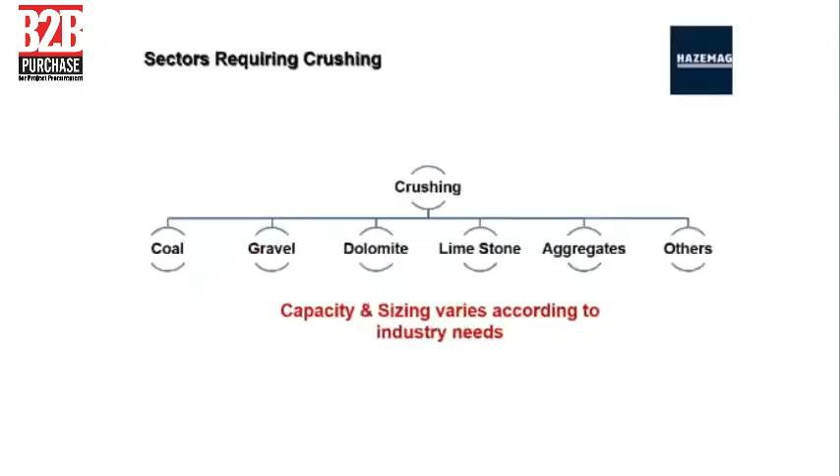As a map per se, we have crushing technology for coal, gravel, dolomite, limestone, aggregate, and other crushings, and capacity and sizings vary according to the industry needs.

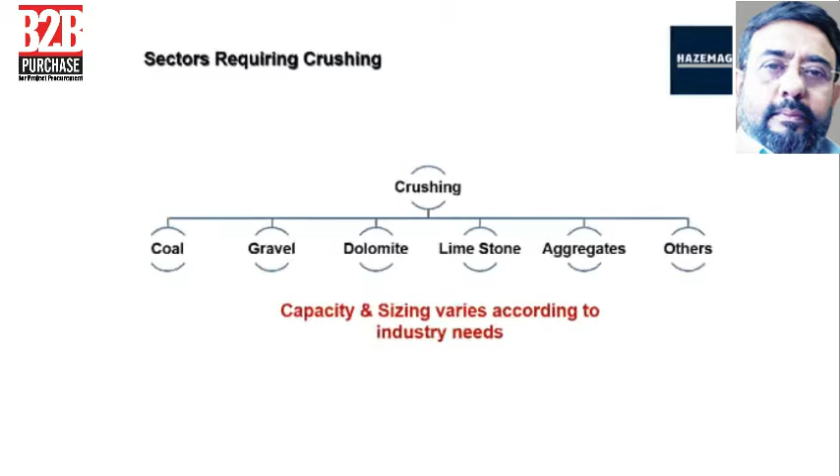So it's very difficult to know exactly what you are going to use in which particular application. That is more important to understand.

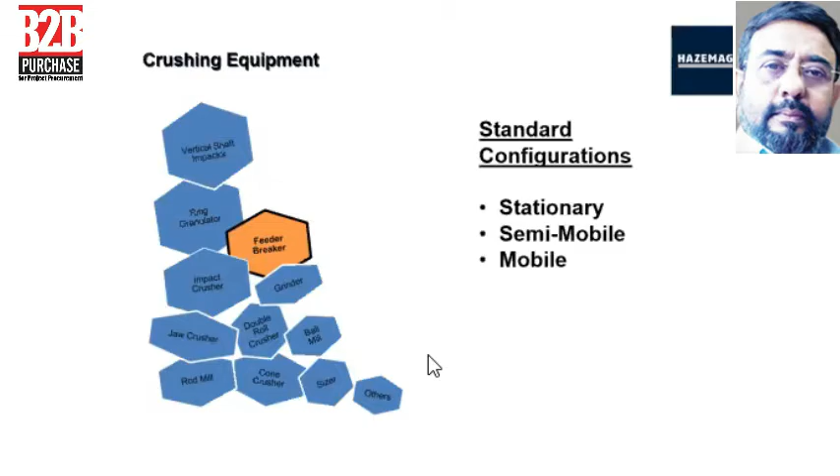Now coming to the case of a mining scenario where coal mining is involved, the market demand is looking for a sizing of minus 100 mm to minus 50 mm closer to the mining face.

Then they are looking for a swiveling conveyor which can do banana stacking, integrated with existing CHP. Many of them have existing CHP, and they want the crusher system to incorporate with that, with low investment on fixed and structural cost, because they have a tendency to move it from one mine to another as required.

Similarly, they are looking for modular design to facilitate easy movement, and pre-screening to enhance the throughput, basically the tons per hour. Everything above leads to one factor: optimum dumper fill factor and shortening of the lead distance.

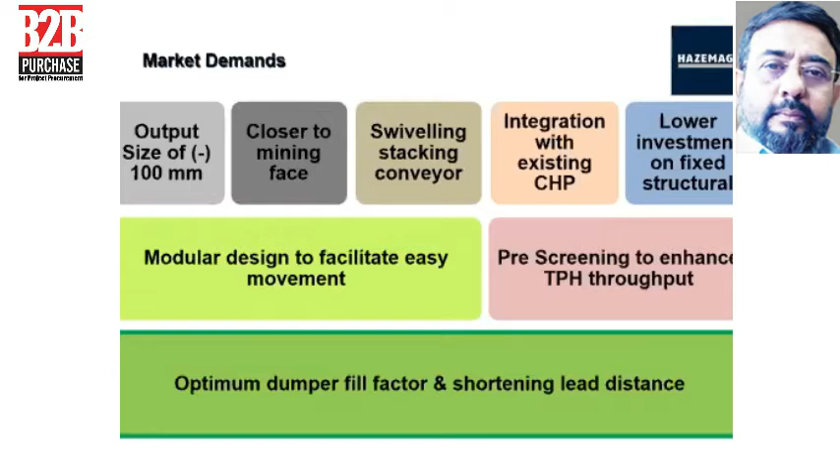So, coming from these demand requirements, we have come out with a solution which was not previously in India, but for the last 10-12 years we have been focusing on this in India, with huge success so far, with limited requirement of structurals, modular design for ease of shifting, reduced cost of production, and lower fine generation.

That is very, very important in today's world. You can see the picture of a particular site where this machine is present, though not very visible.

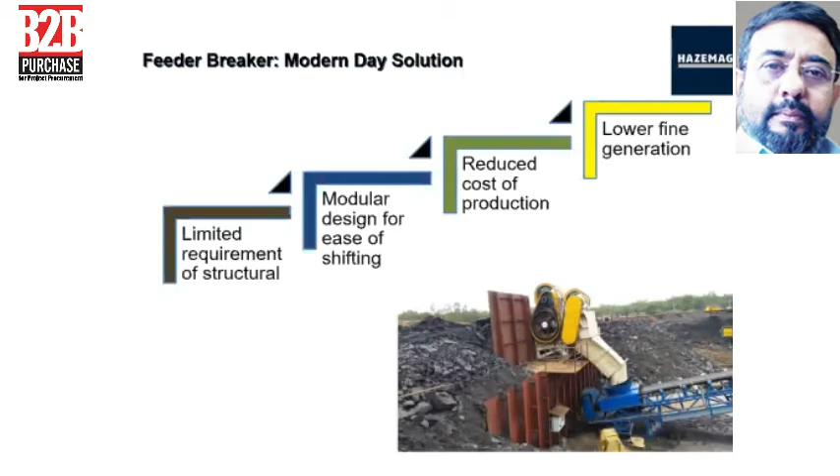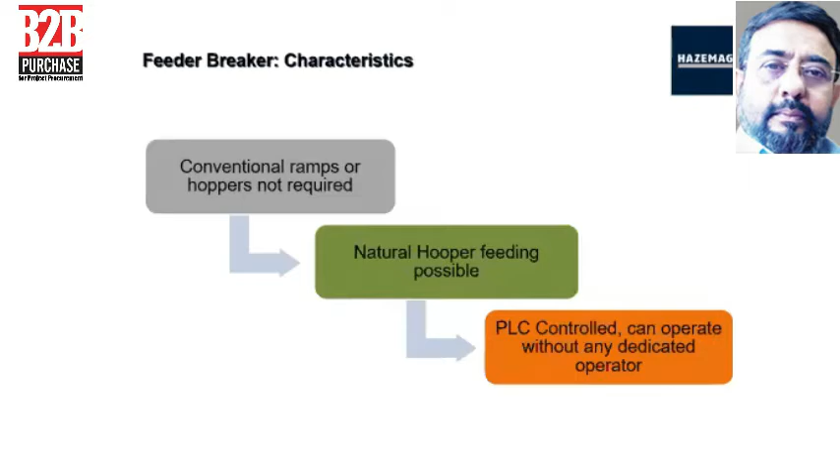Now this particular kind of crusher does not require a conventional ram or hopper to feed the material. It works on natural hopper feeding, which is possible, and these features are PLC controlled, operating without any dedicated operators. So these are the cost-saving aspects that usually go in favor of the customer.

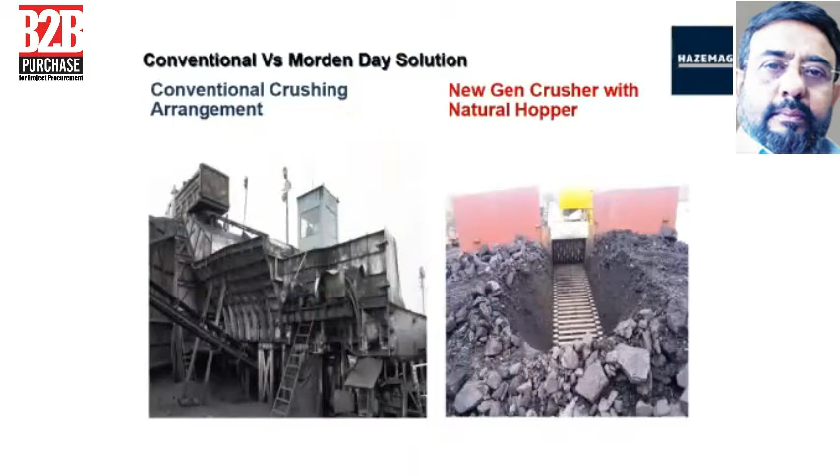Now, for those in the mining segment attending, these are the conventional mining crushers used for the last 30-40 years. In place of that, here is the old one, and the new generation crusher with natural hopper is in front of you.

The machine design is very simple. It has a crusher roll with picks and holders on it, and there is a chain conveyor moving in a covered profile which protects the chain from direct impacts.

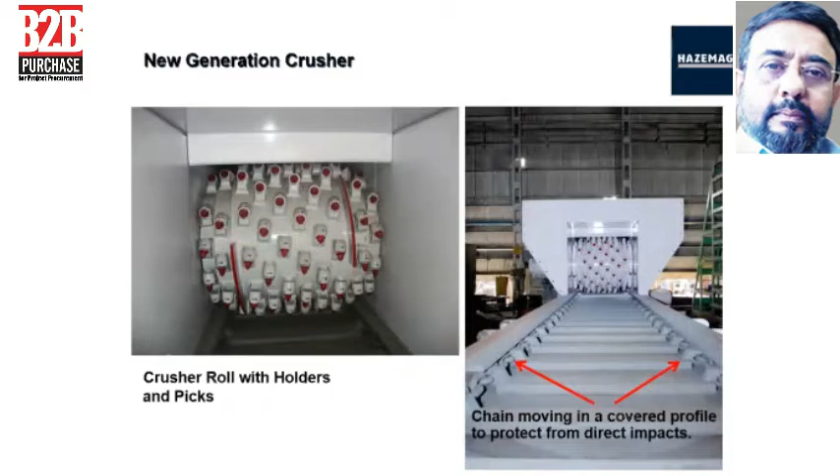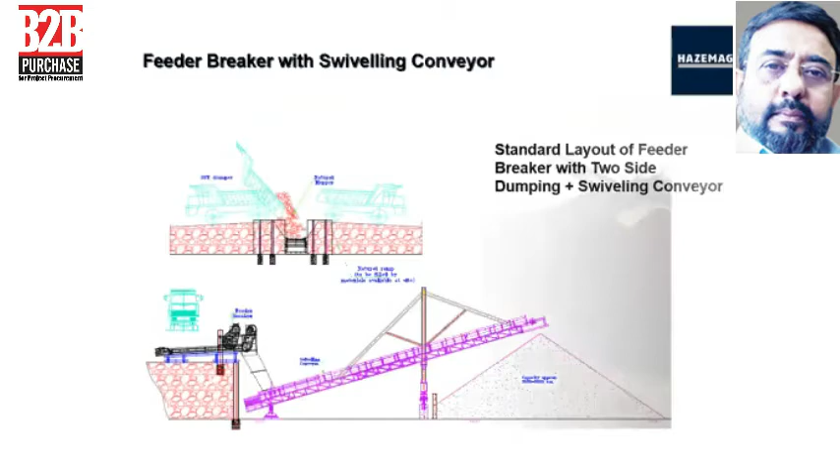Similarly, this is a layout which shows how the crusher is installed on a very small ramp, having a kind of swiveling conveyor in front of it, which today we do on a tire-mounted thing, and that creates a heap of something around 3,000 to 4,000 to 5,000 depending on the customer's requirement. Here are the practical site pictures for your reference.

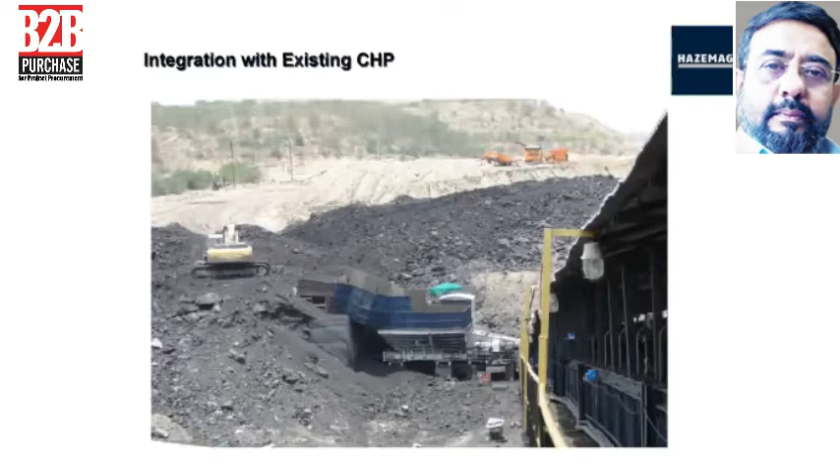Similarly, we see that there are a number of installations in the mine which already have a fixed conveyor and a fixed crushing system, but you need to do something more, and probably a standby crusher is required, or to enhance the capacity they need another crusher. So this is the arrangement where the crusher can be mounted onto the same conveyor which is already there, and in line with that.

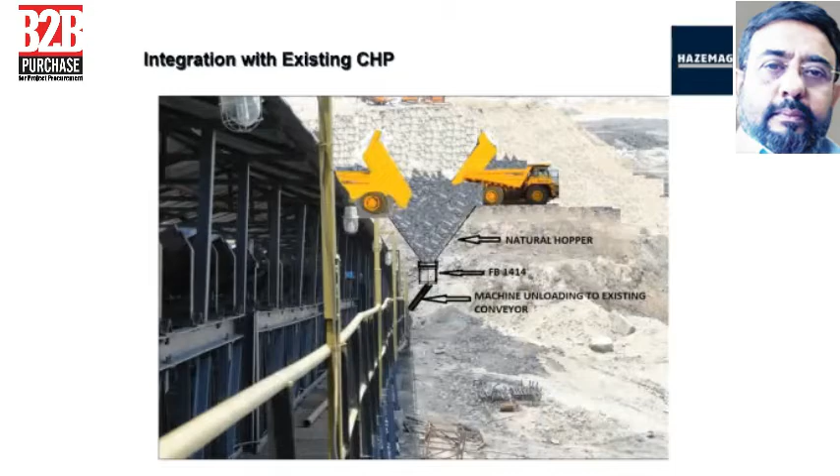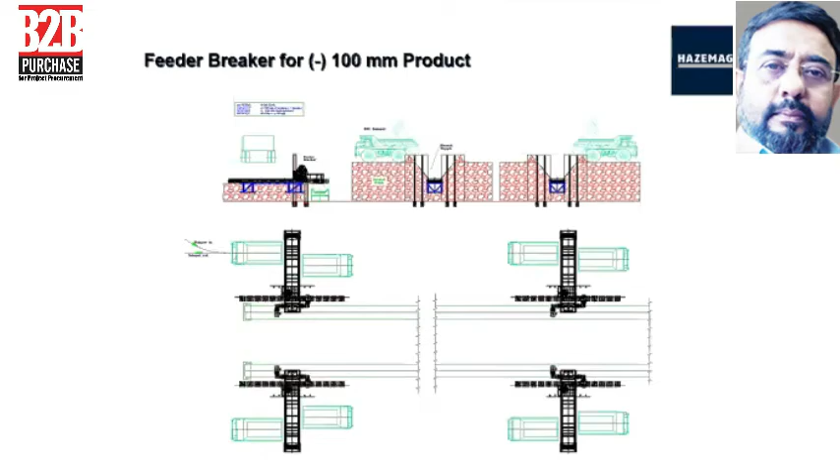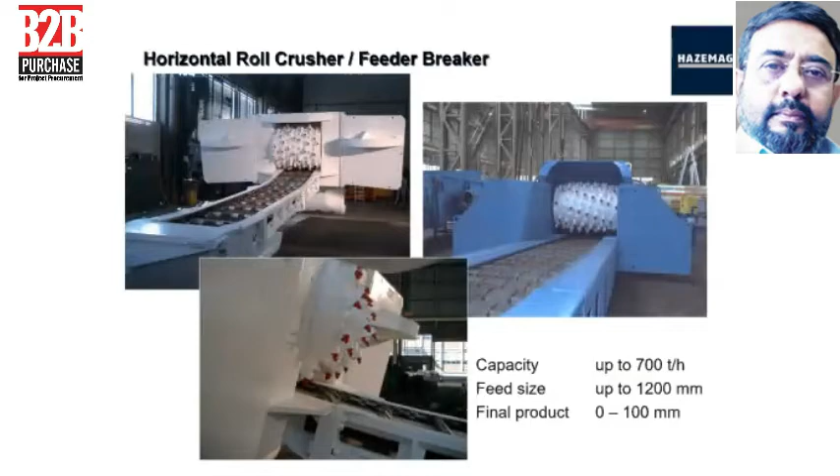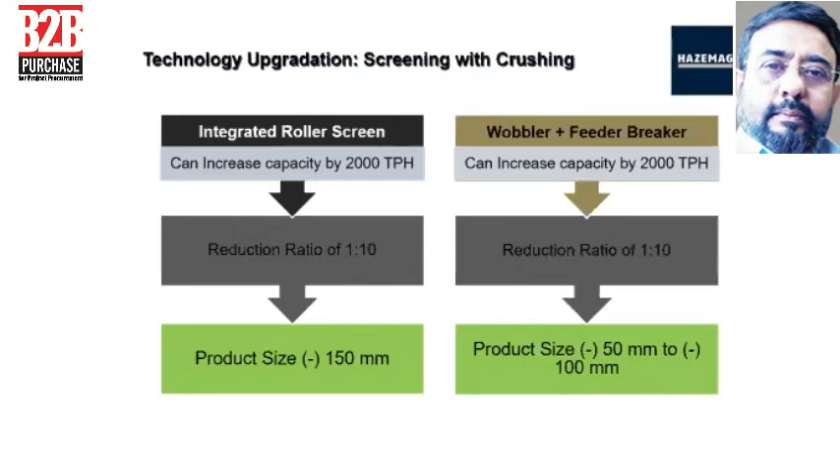Similarly, with this, we add a kind of screen, which we call a wobbler screen. That could be integrated in the roller screen, or it could be separate, with a wobbler plus feeder breaker kind of thing. And this particular screen more or less doubles the entire production of the particular circuit or the particular machine. These are very unique things.

Similarly, for a normal screen the restriction of the feed size is approximately 250 mm, whereas a wobbler can take approximately 1,500 mm without any problem. Moisture is a constraint for a normal screen, where 15% is more or less good, but in a wobbler up to 50% moisture is no problem. And there will be an inclination given at a certain angle for a normal screen, whereas wobblers can sit absolutely horizontal.

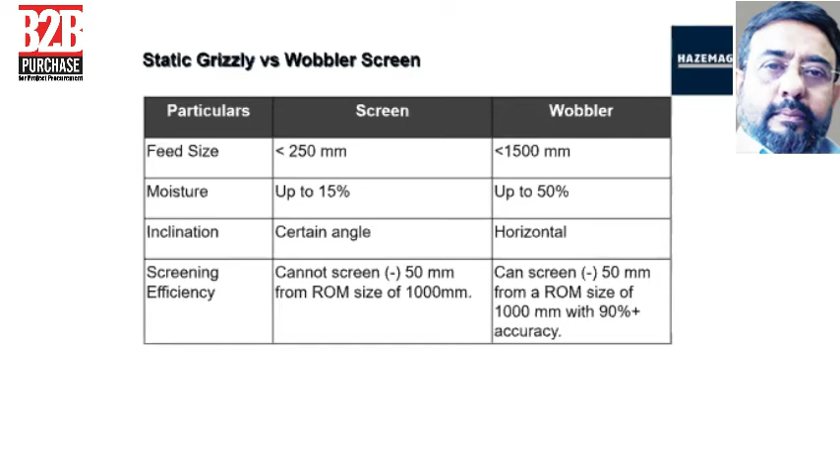And usually the screens in the mining segment cannot screen minus 50 mm from a ROM size of 1,000 mm or so, whereas in a wobbler, we can definitely go for minus 50 from a ROM size with 90% plus accuracy. So what are wobblers basically? Wobblers are very simple and probably

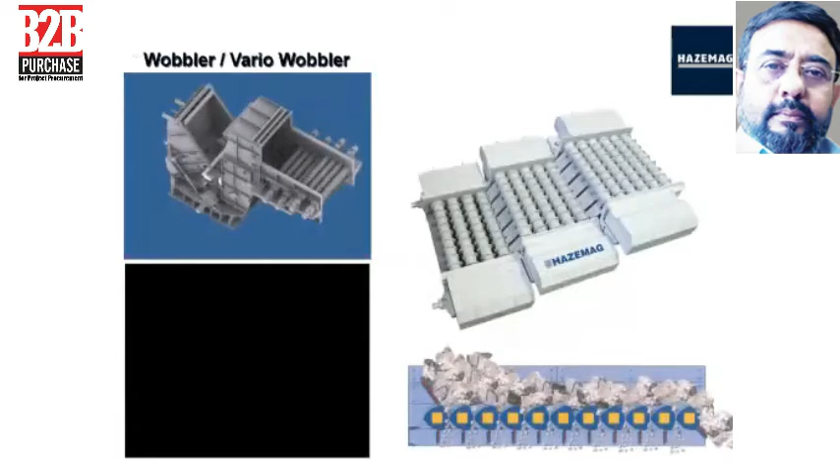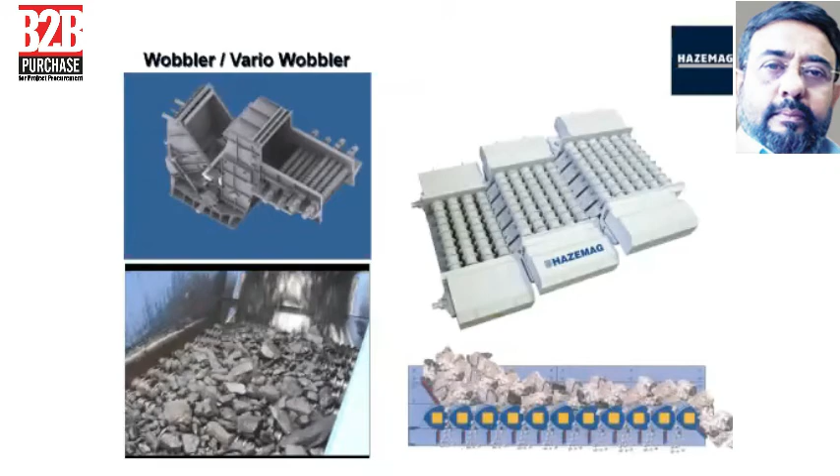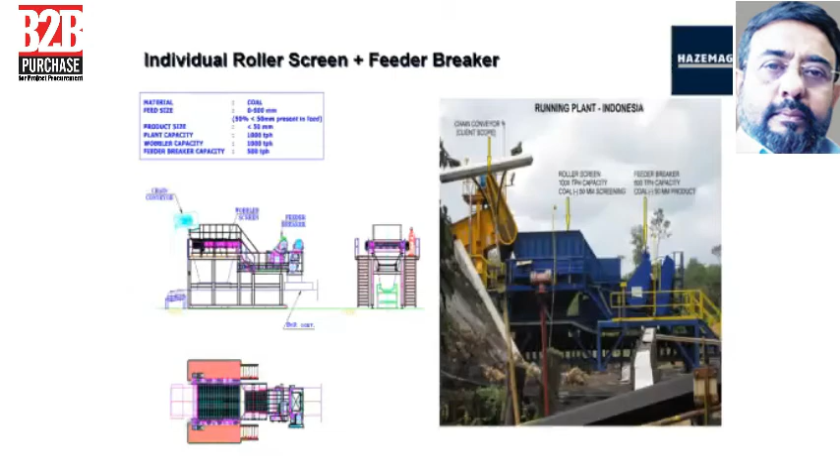just to cut short the timeline, these wobblers come in different versions. This is a single stage wobbler, and these are the 3-stage wobblers, and this is another single stage wobbler where the required size passes through after wobbling and goes below onto a conveyor. This is one of the installations which has a wobbler and a small feeder breaker, crushing more than 1,000 TPH.

Similarly, we have impact roll crushers, which are again very good for crushing overburden. Nowadays, we see a lot of accidents happening where there is a slope failure in a mine, or a sliding of a heap created by the output of the mine as overburden. So we recommend that if you crush and then spread the overburden, your compaction will be much higher, and you can avoid such slope failures.

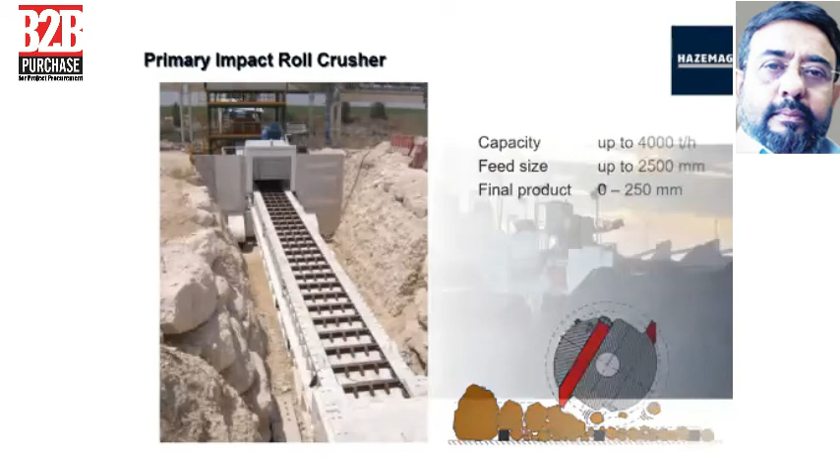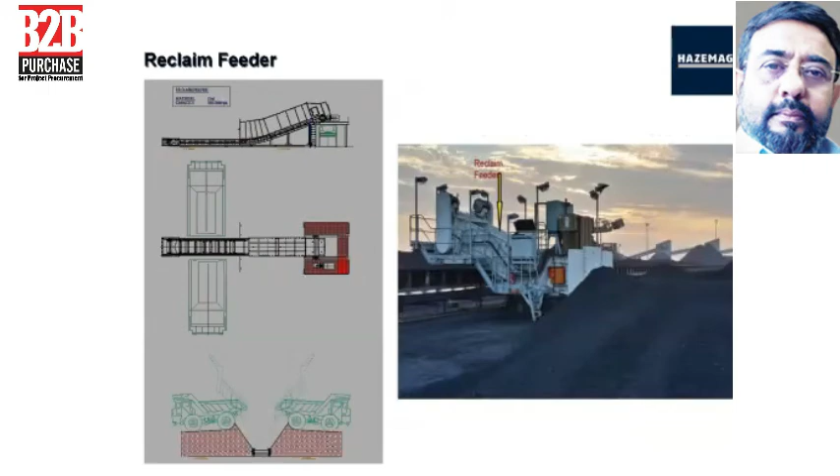We also have a very unique product, which is a reclaim feeder, and these reclaim feeders are used for stockpile reclaiming, and these can be in curved profiles or in a straight profile.

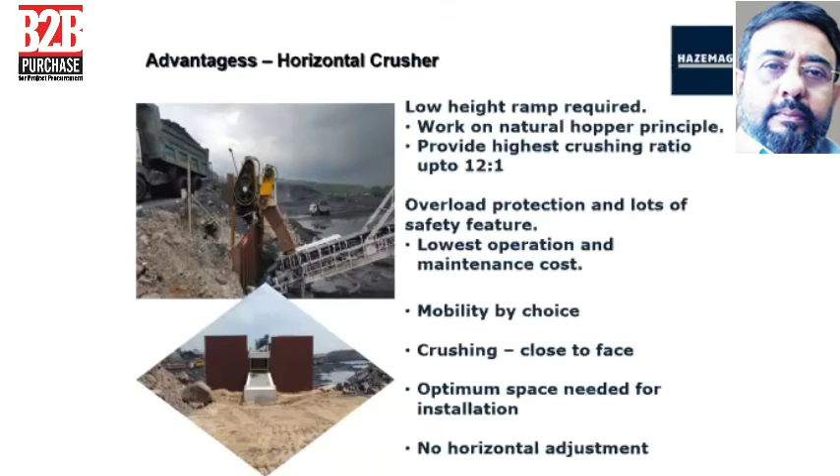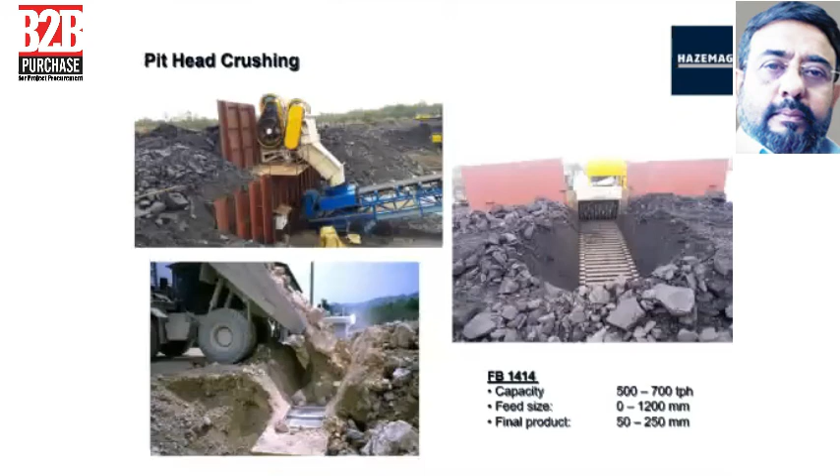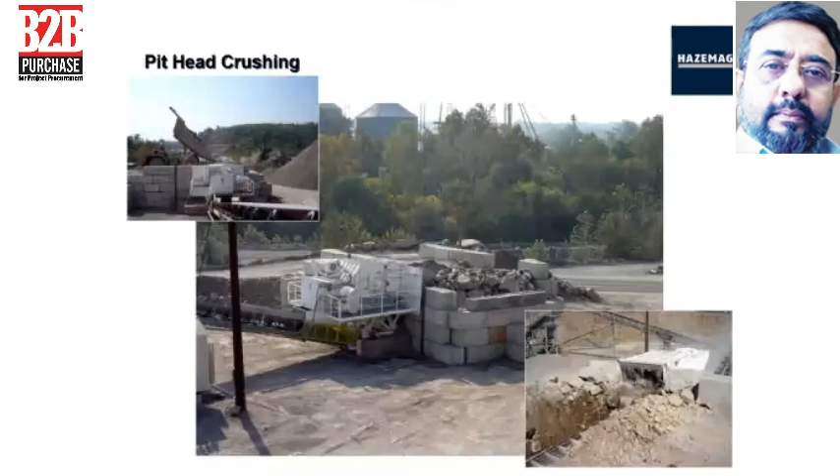These are some of the pictures of horizontal crushers from Indian sites, where the majority of our crushers are working in Southeastern Coalfields Limited, in different mines, and some of them are in Singareni and other places. This is one of the important crusher sites, from the Singareni Vanaguru site, where the two crushers are side by side feeding a single conveyor.